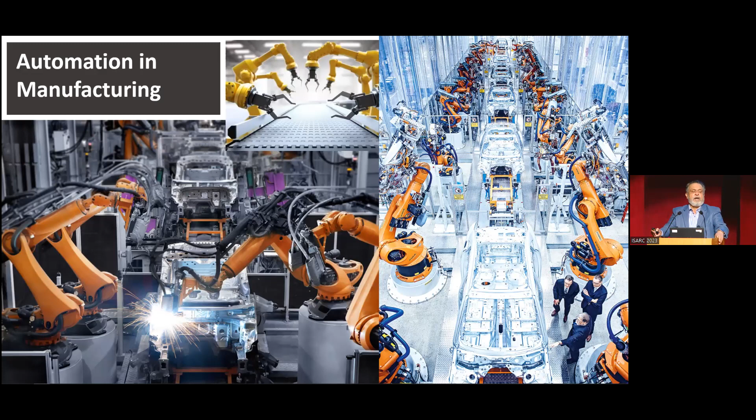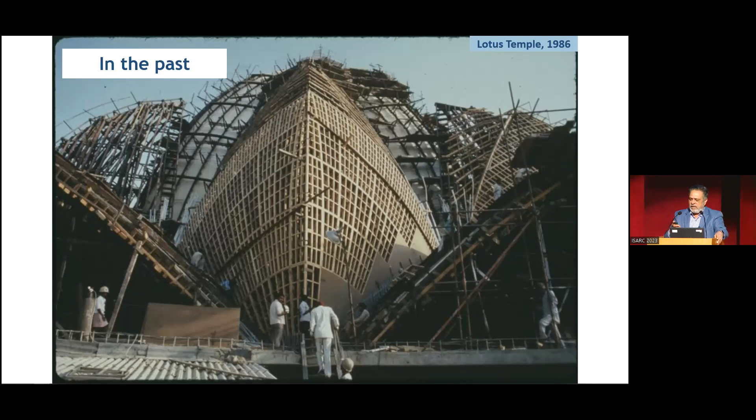Suppose you do a similar building now, maybe we'll do the whole thing with precast. The Kanteerava Stadium in Bangalore that we built is completely precast - probably you could have used precast here and it would have been much faster. This almost took 6 years, using all white cement concrete, no touching, nothing, and we were not allowed to do any welding for the reinforcement. All stainless steel reinforcement - those days, it was all something new.

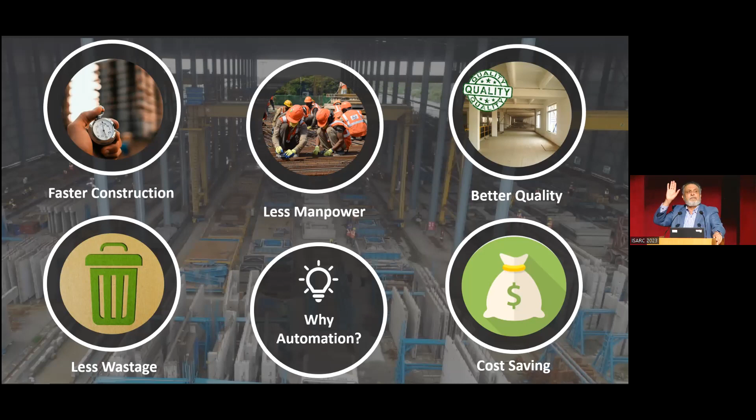Still, I'd like to say I'll show how interesting this is, because I call this the real original hardware of the world. We do buildings - this is real original hardware.

Coming to why we need construction - yesterday I was shouting at my people. I went to 3 places, including Bhubaneswar, where that building is completely steel - a hospital with 3,300 beds, all steel. But we don't have workmen. People went for Holi, then Eid, now Bakrid, and now they're going for the West Bengal election. So we have a huge problem on hand.

We are doing the central secretariat, and there also we don't have people. The government wants everything very fast - some contracts say Mr. Modi is pushing for completion in 2 years, but the technology is still outdated. We keep telling them we can't do things fast if they don't change the technology, and they're somewhat amenable to that. So manpower is not at all there - it's not that it's less, it simply isn't available.

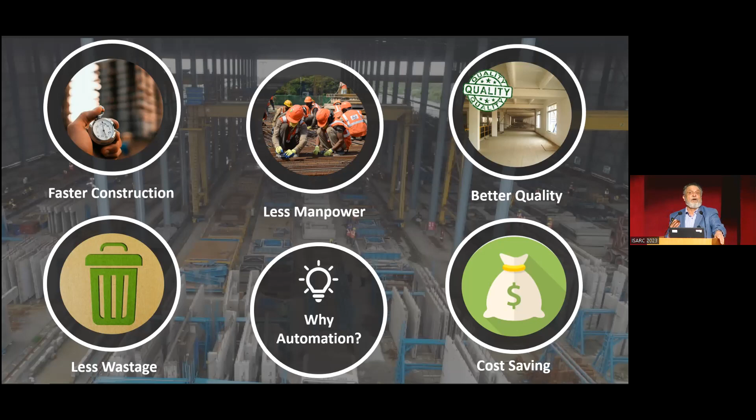On the first and second, I sent all my people to Ranchi to meet with contractors and workers. We also have all the numbers - I'll show you our digitalization efforts. All workers who come to L&T, who get trained and get a health checkup, we have their phone numbers and send them SMS. We have about 10 lakh workers, about 1 million, in our database, and we keep messaging them, but still people don't come. This is a problem we have. Wastage is also very high, and costs are very high. We don't waste 40%, but still there's a lot of wastage in the construction industry.

I will explain where we are today with respect to automation and robotics. I'll take this up in 4 phases. First is precast construction - I'll explain precast modularization, steel building modularization, 3D concrete printing. Then the latest one I feel is PPVC, prefabricated, pre-finished volumetric construction. I'm dividing this into 4 parts.

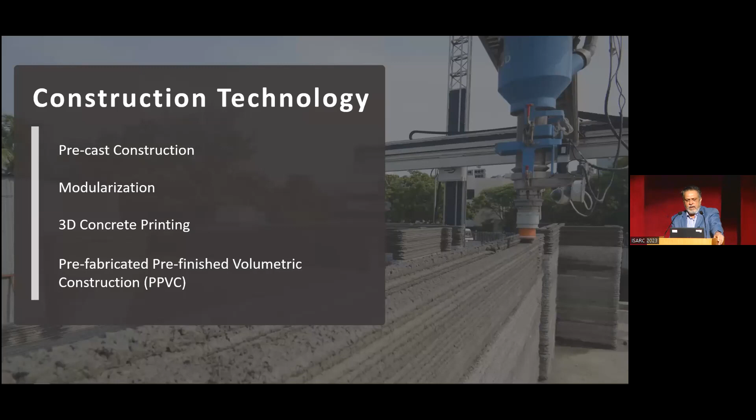In precast, the infrastructure sector has adopted it to a great extent. Whatever you see in India's metros - all the pillars and such - only the cast-in-situ parts aren't precast; the rest is. Whether in Chennai, Bombay, or Delhi, precast has been widely adopted in infrastructure, especially metros. We also adopted precast in housing, especially affordable housing. People doing elite housing want changes and we can't manage it fully with precast, so whatever mass housing we do, we try to do with precast.

We also use a lot of hollow core slabs, especially for IT parks and offices, trying to use precast to the extent possible. In precast buildings, we're also using pod parts - in Bombay, even in elite housing, the toilets are pods. The pod consists of the EWC, the bath, the fittings - everything is there. We just have to erect it.

We tried this once with concrete and then continued. I've been told that in Singapore, all toilets are made only by pods. Maybe this is something we should tell the country, because in a project of 2,500 apartments, you have 10,000 toilets. Doing 10,000 toilets - the cladding, the waterproofing, making sure it doesn't leak - is the biggest problem we actually have in housing.

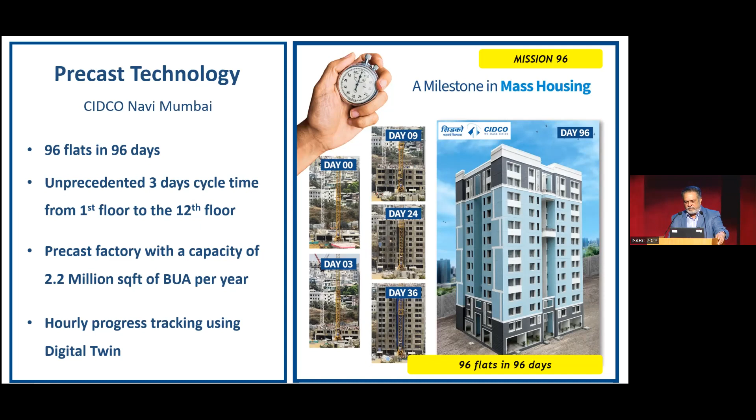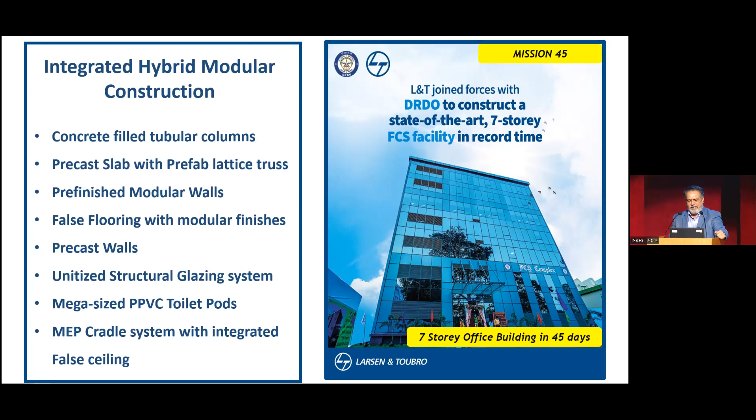We're also using robotics for block work and finishing. To be frank, we tied up with a company, invested money, and they made the robots, but we're not able to do block work beyond a certain height. So we're doing a lot of tweaking so we can do block work, plastering, and painting with various forms that we can remove and reuse. All these things we are developing, but not in a big way yet, more as an experiment.

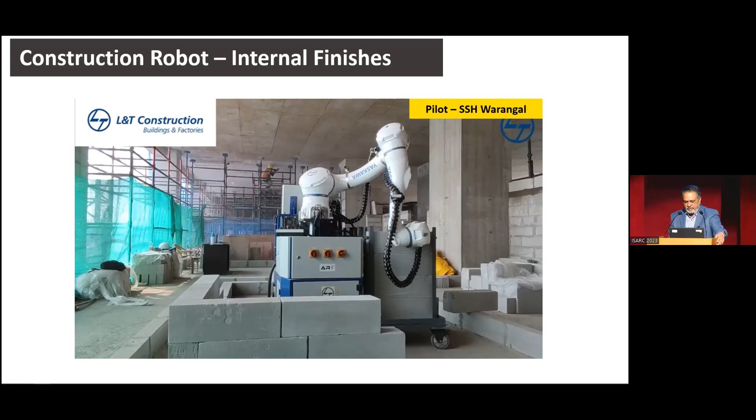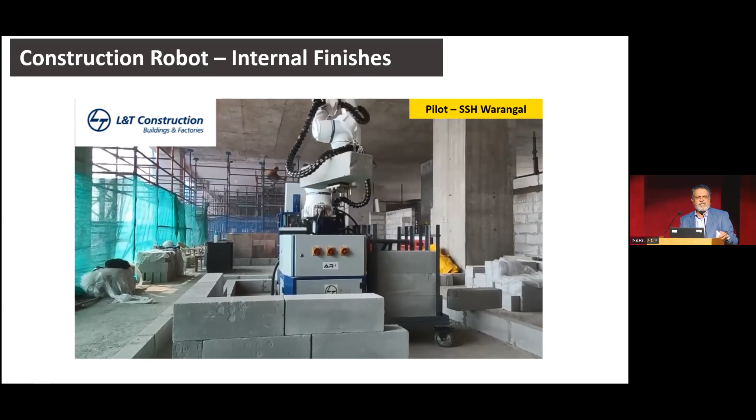But when we don't have workers, this is useful. We are doing this in Warangal, a hospital being built very fast using robotics. It is a massive machine right now, maybe it will become slimmer after some time.

This is something that's a real favorite of mine. This is a post office we did in 43 days, including the foundation. The actual 3D printing itself we can do in 7 to 8 days. This is in a place called Halasuru in Bangalore, very close to the Halasuru post office, and we did everything here with 3D printing.

We also did work in Cheyar, Tamil Nadu, where they gave us a contract to build a factory. They had many buildings, administrative, security, all ground and ground plus 1. We told them we'll do everything with 3D printing, and they agreed as long as we didn't charge extra, so we managed within that cost and did all those buildings with 3D printing.

On the right-hand side, we're doing a project for the BRO, the Border Road Organization, a museum and a place to stay, ground plus 2. This building, 36,000 square feet, ground plus 2, we are doing with 3D printing.

This is probably the largest 3D printing done, they say in the world, but definitely in India. This is the largest 3D printing we are doing now. It will be ready soon. Including design, we had to design this building, and we do the foundation. All the foundations here we did precast. Even in 3D printing, the walls are all 3D printed, but all the slabs are precast. That's how we do it.

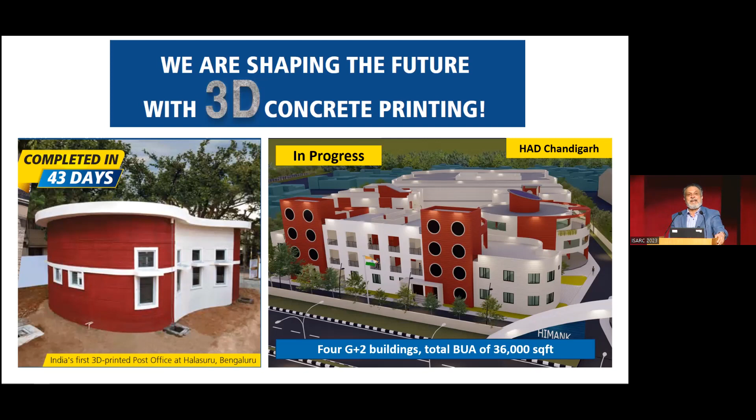I took some developers to show that this 3D printing can be used for villas. So I got a contract to do 12 villas in Bangalore by a developer called Prestige. I need to promote him because at least he's agreeing to do that. When I was doing 3D printing, I called a lot of developers, people from academics, people from IIT and all to show how it can be done. This fellow was very much impressed. I'm doing many jobs for him in Bangalore and Mumbai and all. So he said, okay, do these villas with 3D printing. We got it, did a mock-up, did the testing and all. Hopefully some of those people will be doing the first 3D printed villas in India. This is how we are doing the 3D printing.

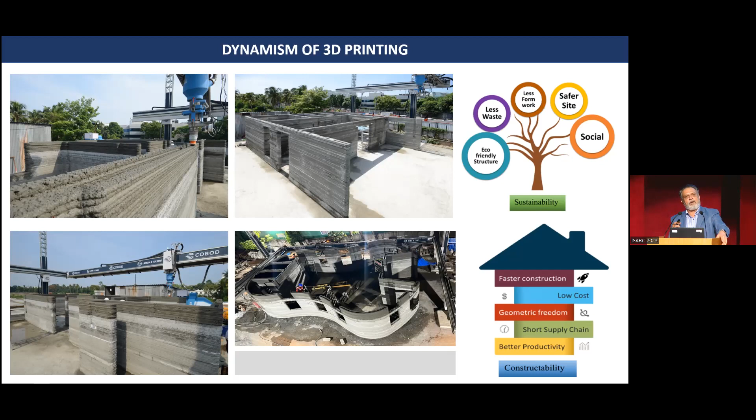Actually, our finishes are not that great compared to others, because we had been to the Bauma exhibition in Germany, and what we've seen there, the finish is much better. But what they use is usually cement and sand. We actually use cement, sand, and aggregates also. We don't use this manufacturer - we manufacture in our own batching plant. We have special plants where we manufacture the concrete. So we use the regular concrete because we're proud that we're using the regular concrete.

This is PPVC - prefabricated, pre-finished volumetric construction. There are many hotels in Singapore and all which use PPVC. We are talking to IIT Madras to do their hostel block with PPVC. I'm sure it can be done, but it will take a lot of time to construct this in a workshop. We'll do it in a very controlled atmosphere in a workshop, and everything will just be lifted into place. I think that's what SNS said - I'll do it in 64 days. So probably if my boss says that, then we'll do it at the fastest speed.

The next one is ModPro, where we are doing buildings with steel, around 350 to 400 square meters - primary health centers, clinics and all can be done with this. We can also do single floor low cost housing with ModPro. So these are some of the technologies that we are doing in construction.

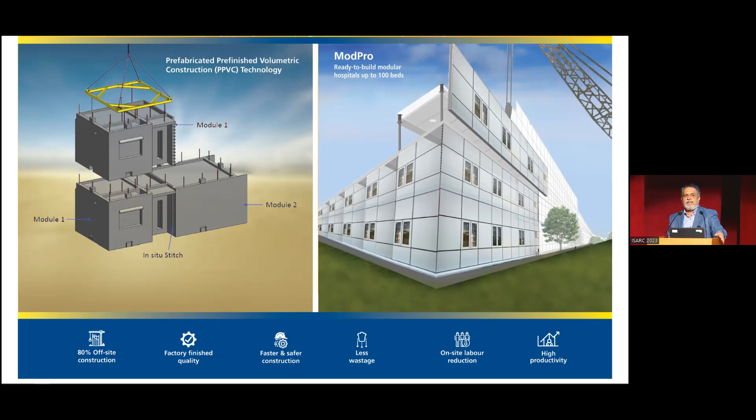In construction itself it is less used, but in other construction related activities like drone survey, I think we are quite big and doing very well. We also have LTI Mindtree, who is also doing drone survey. We use it for data collection, site planning and design, topography, and progress monitoring. I think this is some of the projects where we are using this technology.

We use it in the Mauritius Light Rail transit systems, our mega irrigation project, and in the high-speed rail also - there we fly drones every day evening to see the progress. We did the Statue of Unity, 182 meters on the Narmada River, where it's completely infested with crocodiles. We did the whole survey with drone and were able to take all the contours.

We did a big project for water supply in Madhya Pradesh, going through forests and all, which was an EPC job for us. We completely did a LIDAR survey through helicopters, and based on that found the best route. So we saved some money since it was an EPC bid for us. If I took the route through the jungle, which is much easier and faster, I was able to do it because of the drone survey. I think this is where India is doing very well in terms of drone survey and monitoring physical progress. I think we are doing quite well here.

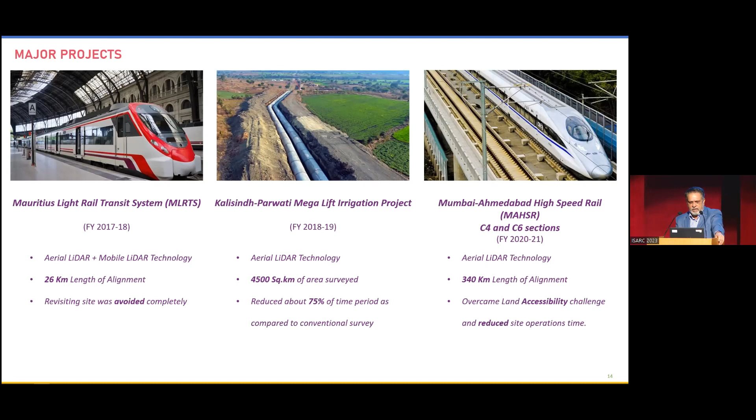Next comes Internet of Things. Here also I think we are doing pretty well, because many people from the US come here and say that what you're doing in IoT is much better. I'll just tell you.

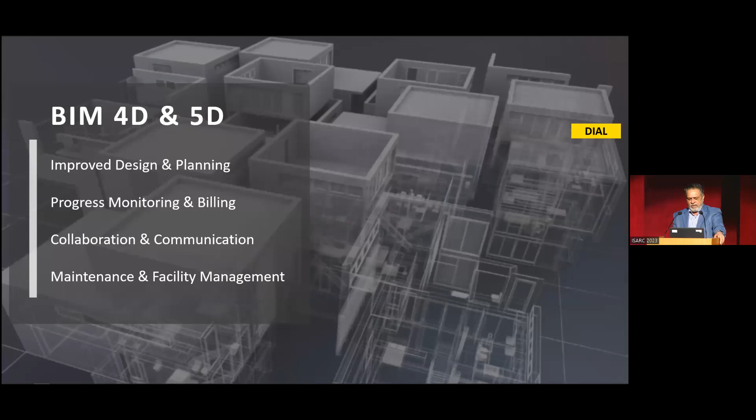All our tower cranes and everything are completely digitally controlled. Every day you can come to our exhibition center and see how many cranes are working across our projects, how many times each is rotating, and what weight it is lifting. All our batching plants are connected through IoT. Sitting in Chennai, we know how many batching plants are working at each site, how many are idle, and what stock is available there.

I think all these things are known to us. We are also able to put RFIDs and see where things are. Even in precast elements we put RFIDs, so when we do the erection, we know that this precast is erected. So we are quite big in this.

So now L&T Infotech and Mindtree, LTI Mindtree it is called now, they do this thing.

This is BIM, and 4D and 5D. L&T started the first BIM in the Delhi International Airport in 2008-9 when we began. The whole design was done through BIM. From that day, all our design-build jobs use BIM, and today we are using BIM in IIT Roorkee.

What we have done is that the whole billing is also in BIM. We discussed with the CPWD guys and told them we need to do something different in this project. They agreed, so everything in the project progress is seen through BIM. All our projects go through BIM.

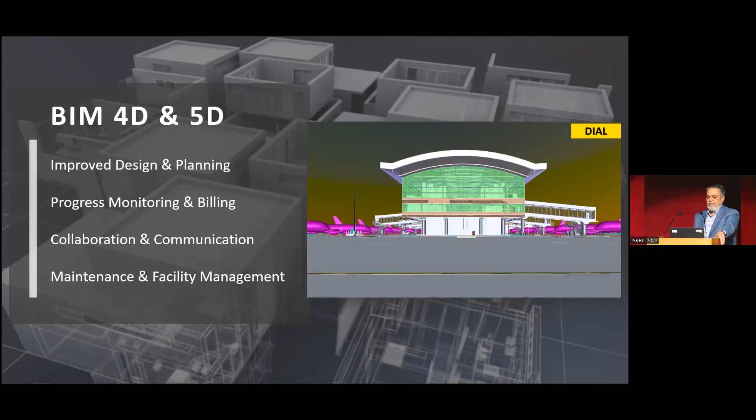We actually have safety schools, one here in Chennai, in Kanchipuram, and one in Baroda. It is an experiential center where you can go and see what happens when you fall, how you fall, everything is learned there. We also have VR there, with all our programs in various languages of India. So before we take workmen to our sites, we send them through this so they know what it's like. You can actually feel, suppose you fall, you can almost imagine that you're falling. We are trying to make sure that most of the workmen are safe.

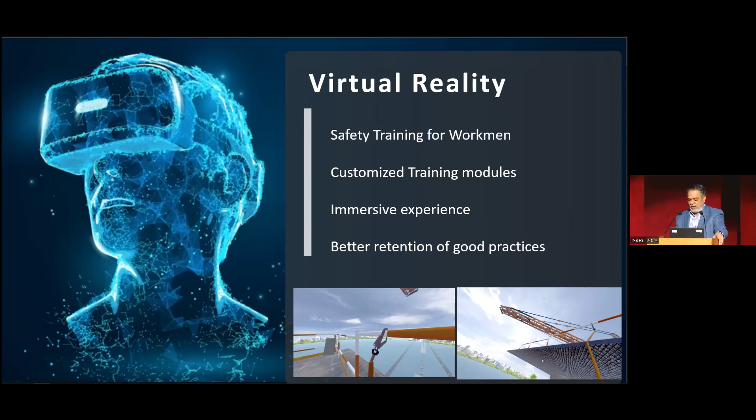We are also able to do predictive analysis with safety. We can say which job sites are prone to what, like things falling from height, or electrical circuit problems. There's also excavation work, during which we do risk profiling of similar jobs, like the professor was saying, we already do that. So we do risk profiling for each job and say, in this job we need to focus on this. This way the project director and project leaders know what needs to be done. I think we are already doing this.

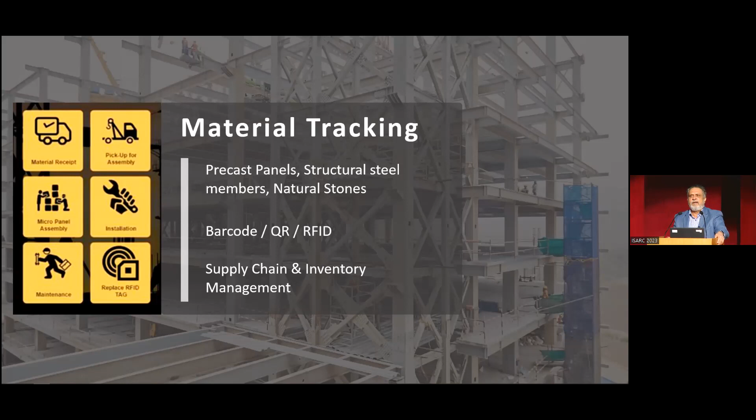Next is material tracking. As I mentioned, for precast panels, structural steel members, all these things we're able to track using barcodes. For the Statue of Unity, we got the bronze panels from China, and we had RFIDs on all of them, so we were able to assemble things and update it through BIM.

The next one is an app called Visa, for the workmen. Here we have a database of all the workmen, and when we onboard them we capture their attendance, when they come, when they go, the periods when people work and don't. We also do health checkups - somebody is good, somebody is bad. This fellow can work at height, because not everybody can work at height. At ground level people can work, but when it goes to height, it's not possible. So that is something we do.

I think AI is learning, and similarly all of us are also learning. This is what I think will be the future one day.

Drone erection is also happening today in many far off places. If you see the transmission towers where people cannot go, it's all being done through drone erection. It's happening even in India, and we have done it, along with many other companies. Probably you have to do it in a project where we just send materials to robotics, and then make sure all erection is done through the drones. Very little physical interference - I think this is what we are thinking, because we simply don't have people.

As Professor Benny rightly said, this is the most hazardous industry. Nobody wants to come here because, even though we are the most populated country in the world at more than 1.4 billion, we are not getting people. And the productivity is so bad.

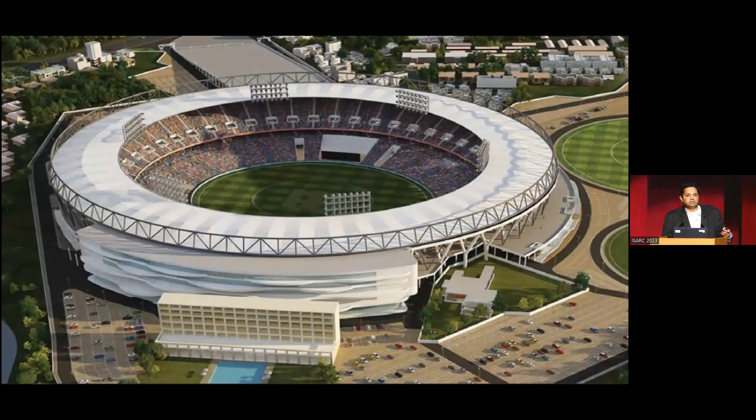So I come from the B&F vertical. You will see the presentation is fairly influenced with mostly buildings and factories. I am going to go into a little more detail, though it will still be rushed. We won't go into very great detail, but you'll at least get the flavor of the things we're doing in recent times in terms of technology and the digital space.

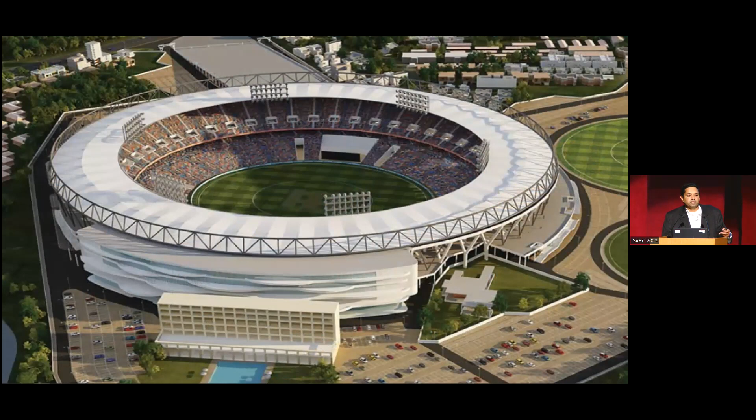And if I have to list out some of the largest and tallest, L&T, we keep telling largest and tallest. This probably comes first, the Shri Narendra Modi Motera Stadium. We are doing the high-speed rail. This is not part of our vertical, but again mega - this girder you see is about 40 meters long and weighs 1,000 tons.

The fun part is the team is not excited about the girder, but excited about the straddle carrier they built in-house to carry those girders. The automation, the precasting is a norm, but the automation or mechanization we are pushing through is evident everywhere. Pick up any project, especially in recent times, and you'll see we're trying to do things very differently.

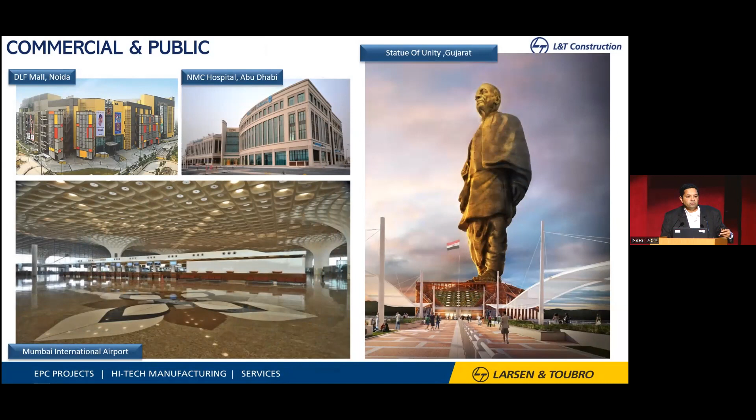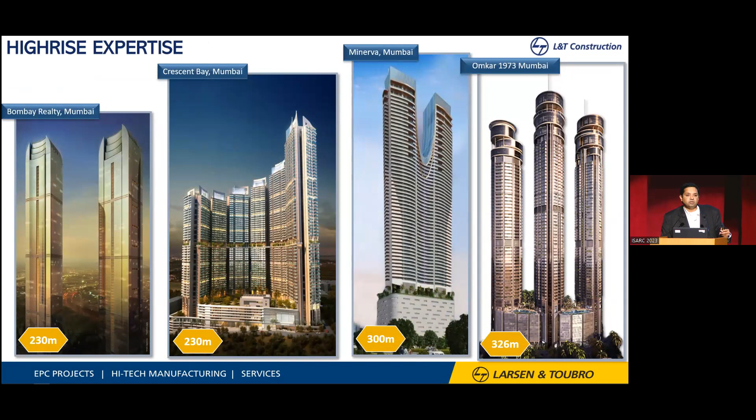When I go into the details now, I'm going to rush through the project-specific details, but there are 3 or 4 slides we'd like to build on in line with this conference theme today, and where we feel the last 15 to 20 years, and where the company is moving. If anyone asks me what is the construction mantra, the answer from everybody in the team would be: one is mechanization or automation or bringing in technology, and then again, the last 5-6 years, the other side has been digitalization. These two things are encoded in our DNA.

In every project, you will keep seeing that. And what closes the loop is the innovation and efficiency behind it. So it keeps going in that circle - your mechanization brings efficiency, that efficiency is tapped by digitalization efforts. We collect the data, we analyze the data, then feed into saying what we need to innovate further, and that goes into newer technology, and the circle keeps going.

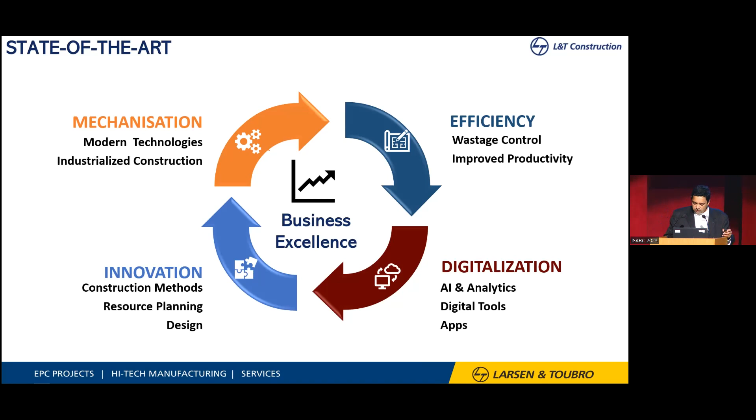So you take a G+4 low-rise building, not great change - we are doing it well, maybe we have to push it a little further. If you go into 10 to 30, 35 stories, a lot of changes are coming in the way we are building these buildings. Again, if you go to the high-rise system, maybe 50 stories tall, whatever we are doing is probably fine, we're already doing that. We'll start seeing some changes in modular systems, but the crux will always be some sort of hybrid system - not one technology will rule the construction space.

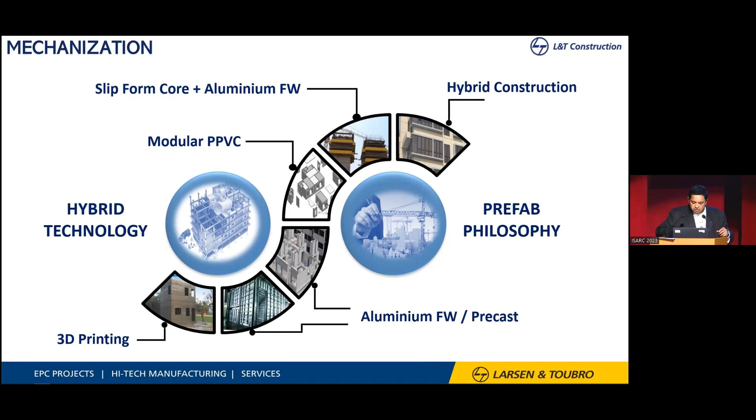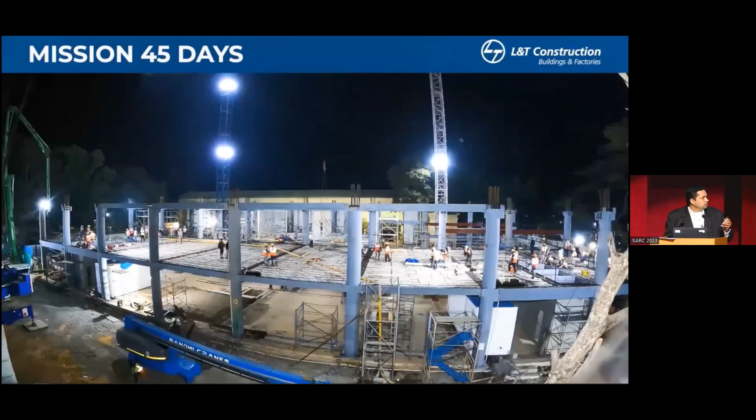And the undeniable thing would be prefab or off-site manufacturing. Whatever challenges we discuss now, not having the workmen and all, we will have to take that construction off-site and build at that efficiency. This is actually one of the finest examples of that off-site construction - Mission 45 for DRDO, whatever building you're seeing was built in 45 days. This is a kind of imagination or time-lapse video of how that building was done.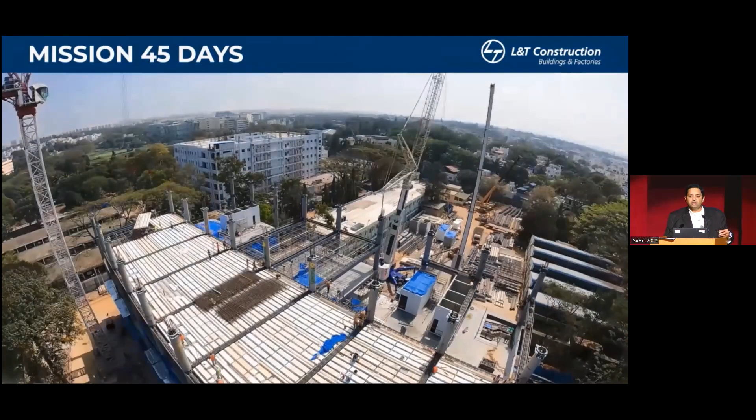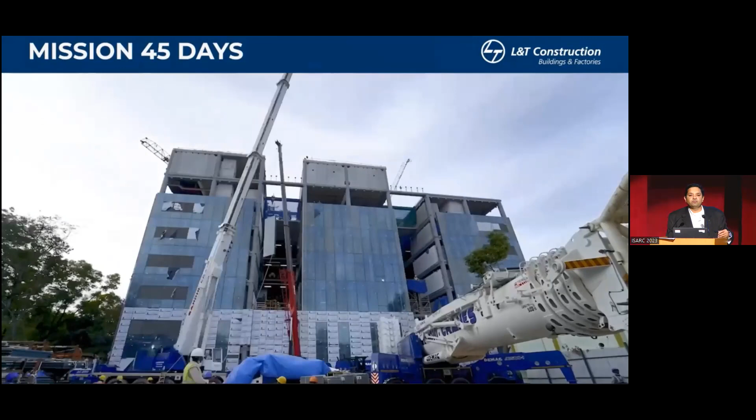But exactly as planned, right? That's where that assured delivery, what we follow now - that we will tell you something, we will try to deliver the same thing in what's promised.

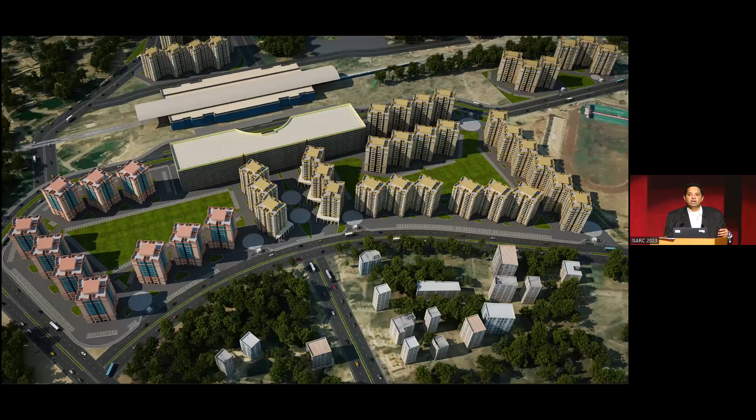If I get into the residential side, now we mentioned about that Mission 96, but the whole precast was feasible there because of that large volume, right? The entire tender was about 45 lakh square foot of built up area. And that's not the fun part - the key thing was, it was to be delivered in 42 months. That's the kind of projects we are looking forward to in that space where precast was taken up.

And if you look at the math again, it's about 8 flats per day - that's how the delivery schedule is. This is where we took that call that conventional systems cannot be used to build this project. The entire tender was at that time taken using precast construction.

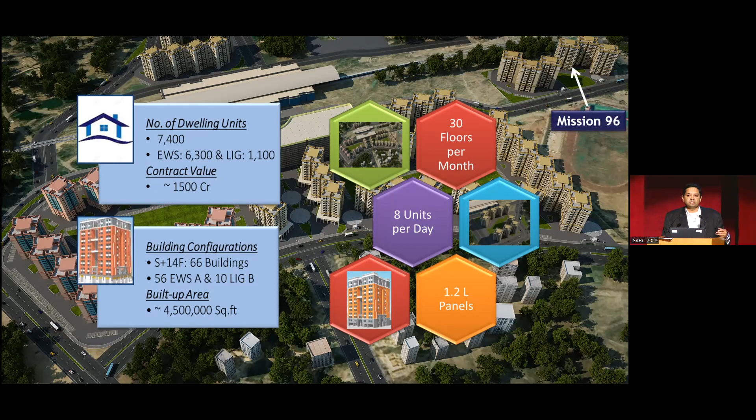And if you see that one corner tower, then later we say what the technology can do best, what we can showcase with the technology - not per your plan, but the best of the best. That Mission 96 was taken, where we built one tower, 12-story tall, in just 36 days. That's where the technology, the mechanization is standing, right?

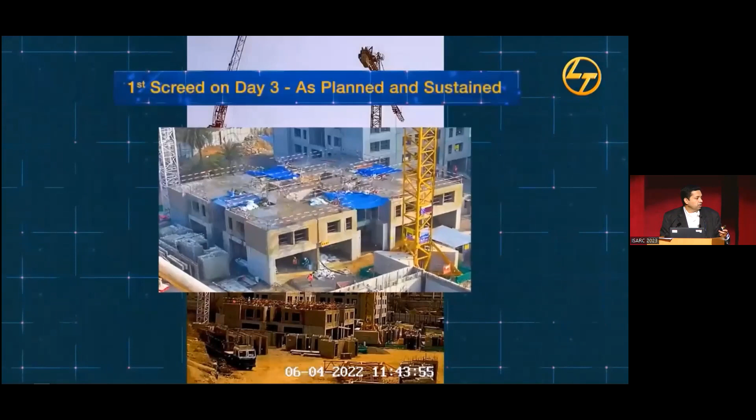3-day slab cycle, which is what we have been pushing for the last 5-6 years in that space, and that was achieved quickly. Again, this is a real-time time-lapse video, right? It was slab itself in 3 days. Like usually we do 6 days, 7 days, then pick up and go with that thing.

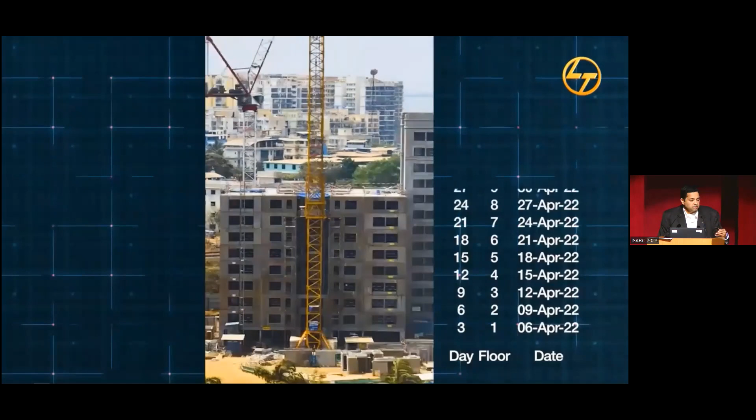But exactly as planned, hour by hour planning, and delivered in 10 days. The water tanks also were delivered in 7 days - total precast system. We had water in those tanks in 7 days. Finished as planned.

Then we come to this 3D space, right? Why we are doing 3D - a lot of times the question will come, okay, why 3D? Yes, it is a speed game, but more than speed, it's a productivity game, right? If I say a job where I need 100 people in conventional construction, I go to precast, I'll need 30 people. I go to 3D and probably we can handle that in 5 or 6 or 10 people and get the job done.

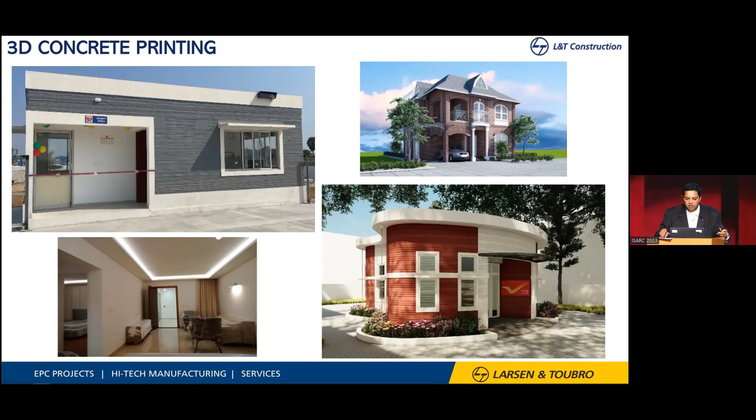And this is again one more time-lapse video for that post office building, right? This was one of the first jobs, but like I said, 43 days, and the actual printing was done in about 12 to 15 days itself, exactly as planned.

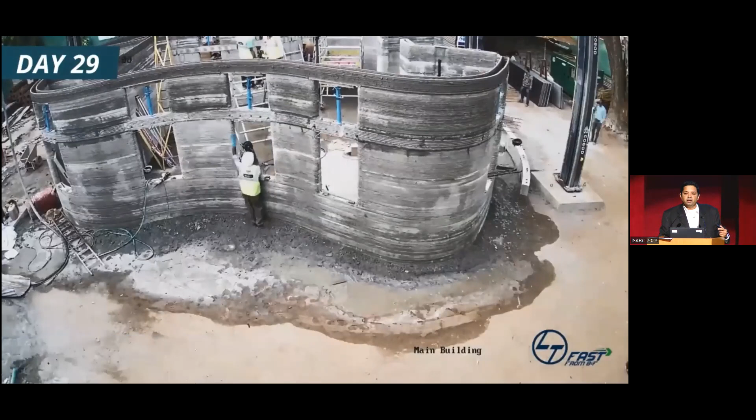Again and again, everywhere you will see that timely delivery is what the motto is, what the focus is. We will promise you something and we will deliver in that time.

This was one of the unique jobs where we decided to keep the exterior with that 3D technology and not finish it or plaster it. Because plastering it - okay, we are used to seeing that - but then that kind of takes away the advantage of what you're building in terms of speed using 3D. So you kind of have to learn to live with the technology and not try to force whatever you've seen for the past 30 years into the technology and then take the efficiency out of it.

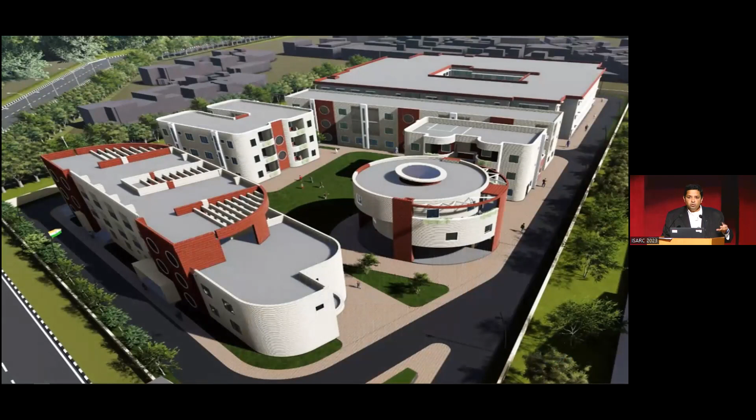So with that experience, now we took the next step where we have our SLN here who has been driving the 3D, and we took this job, almost 36,000 square foot of built up area. And you will see peculiarly in that job, again, we are trying to take the advantage of the technology - you will see the buildings have curves.

You see the middle one - I think Rajkumar Murli is here, you can interact with him - but he sliced the building, and the way it is designed now with the shifts and all, it's a nightmare to do that in conventional formwork, right? We had some areas where we said we will do beams and all, but the site team is coming back and saying that I don't want to do conventional, I don't want to go ahead with that system itself.

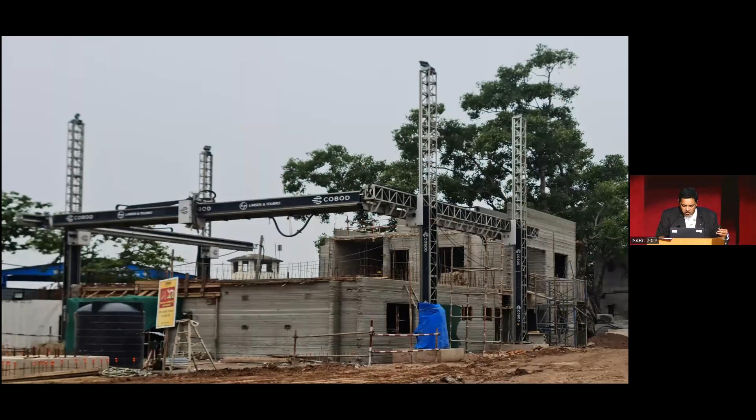And this is actually the real life picture - this was taken 10 days ago, but between those 10 days now, we probably built another floor. We are hitting that 6 or 7 day cycle and continuing, right? Then next we discuss about the PPVC.

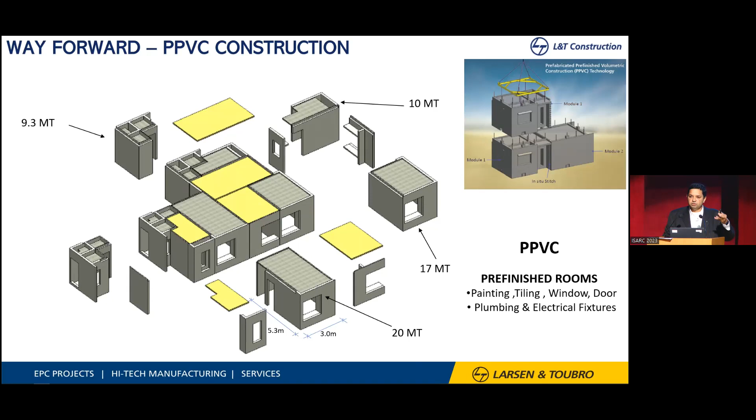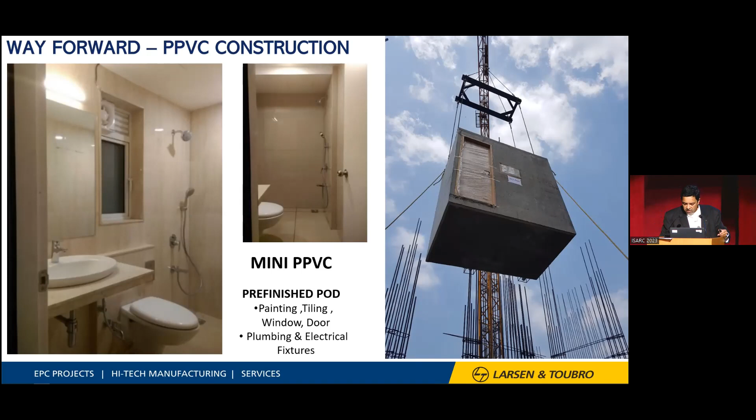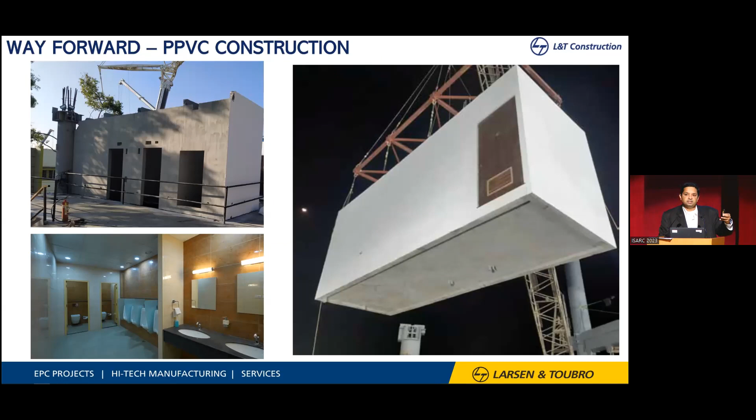The same approach was extended in this DRDO building for the larger commercial ones. These are again 30 ton pods, but here the finishing is done at the site level - pods are brought from the factory and then installed.

So with that, we quickly come to the second part - the digitalization, mechanization. Yes, we have been doing that, and of course we've been doing mechanization for a much longer time. Digitalization is new, maybe recent - the last 6-7 years we've been trying. But why do we need digitalization in construction?

Most times the answer is BIM drawing, but what we have done is probably taken 6-7 steps beyond that. We are not using it just for BIM. The BIM of course becomes the central model around it, but what we're looking at is the interaction of various agencies in that construction project - not even just internal, lot of times external agencies, even the client, can look at it. Clients are reviewing the BIM models, approving the finishes.

For that Sidco building, which came right in the middle of COVID, our architectural finishes were first approved on a BIM model and a VR set at that time because they couldn't visit the site. So we visited their offices and showed that, and it was approved in that way.

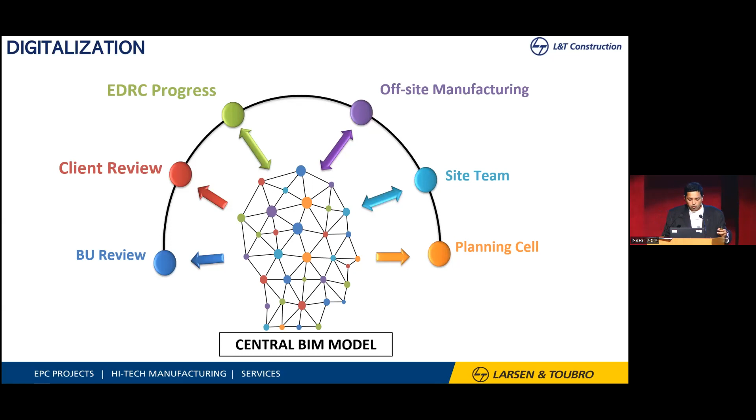In that line, we have been pushing this digitalization, and you will see several activities across L&T. That true big data sense we will get when we start looking at all our equipment, all our connectivity, a lot of numbers. But what it actually translates into is we're trying to push it across the entire construction ecosystem, not just one area like drawings or P&M. These various aspects are becoming a way of life, and that's where we call it the digital ways in L&T.

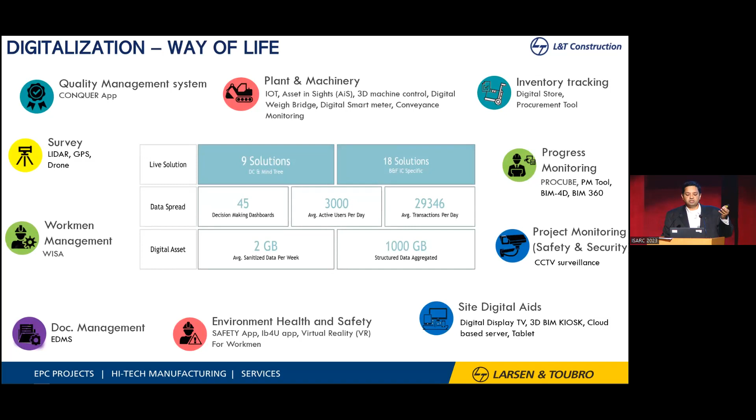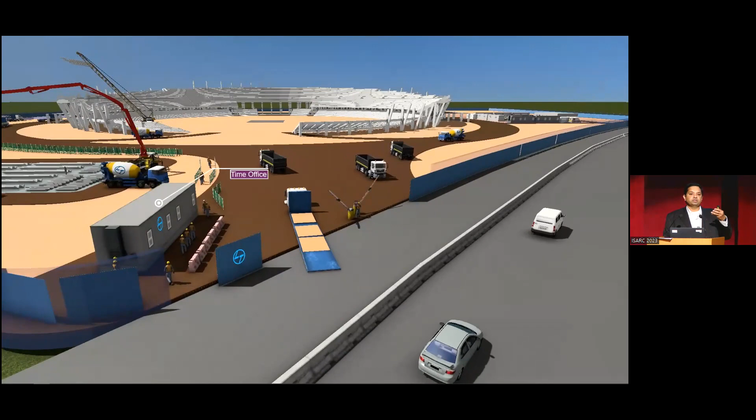So this is a simulation done pre-tender, for a stadium - not only for the client but even for our team, to see in real life how we will set up the project. The project director gets that whole view, and his experience lets him quickly say this doesn't work, this works. Instead of a 2D drawing, we're walking through each step, each activity, including people walking, the walkways, how they get in and out of the site.

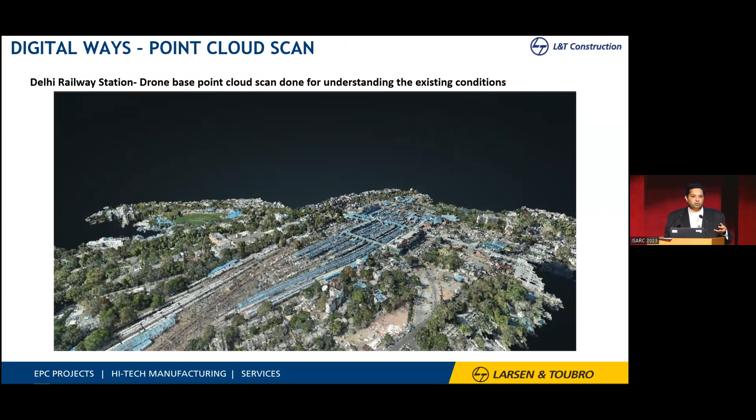This is another example, for the point cloud - day before yesterday there were a lot of debates on that. But for this Delhi Railway Station, we have used it and it works beautifully. Instead of just looking at a 2D picture, you now get a 3D real life model directly scanned from that drone. BIM - we've been using it since 2008, but we have probably now taken it to the highest level.

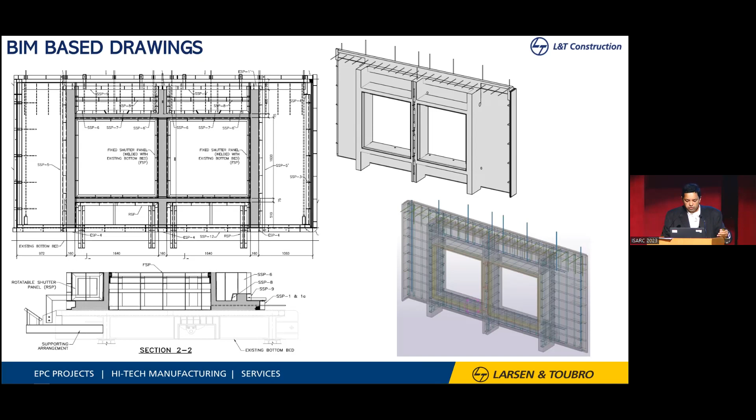But that's not the end, right? Even the molds, our CMPC teams, they define the molds, design the molds using that same BIM model. So I don't have to worry about repeated information and the issues that come because of lack of information. Then what's next on that BIM model is we built our own app to track it.

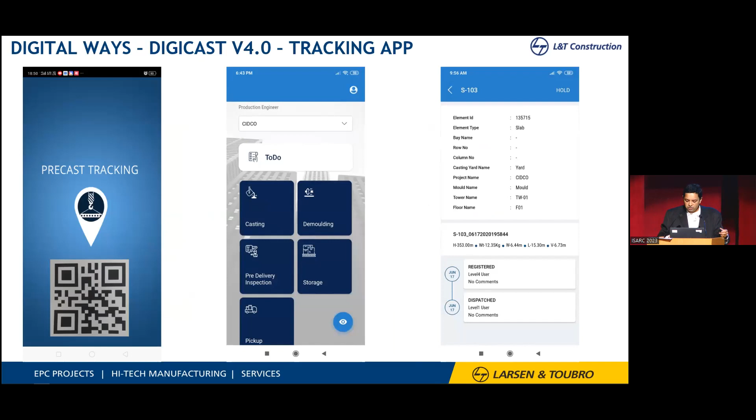I think what now has become a material tracking app for our entire B&F, but it started for the precast, where the idea was you have each element, you track it through the entire life cycle. When that element was cast, with what grade concrete, who checked it, who signed the checklist, how long it was stored in the yard, when it was shipped to the site - the entire life history is being tracked.

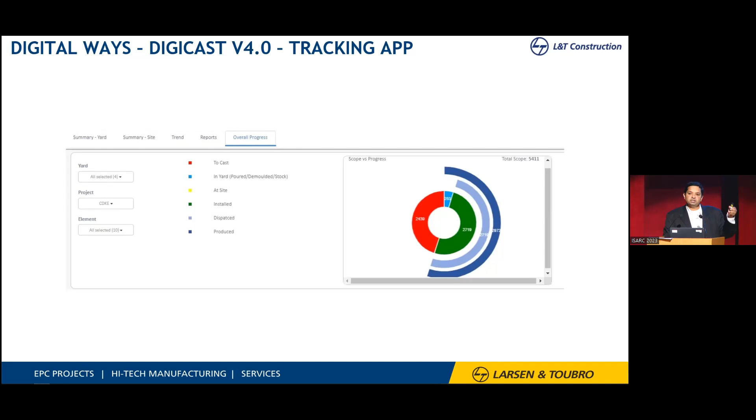And that's record keeping, but it's all real time. Usually we've been doing that in an Excel spreadsheet, but here we are looking at the moment the scan is done, at 8 o'clock in the night it shows on the portal and adds, okay, saying these many elements are there, these many are on the truck, these many are site stored. It gives me a real time picture of actually how many elements or how many towers are also being built.

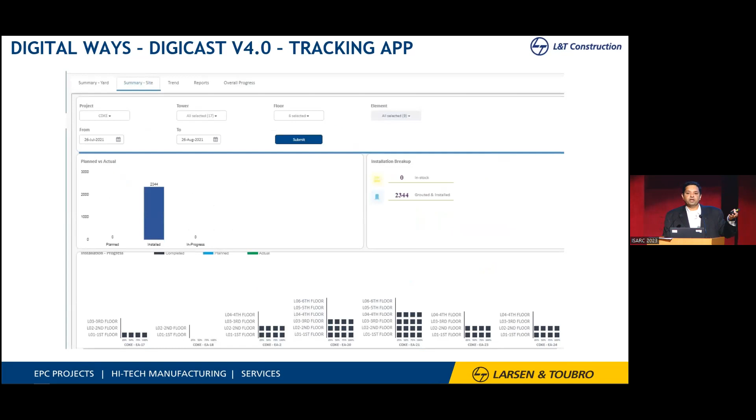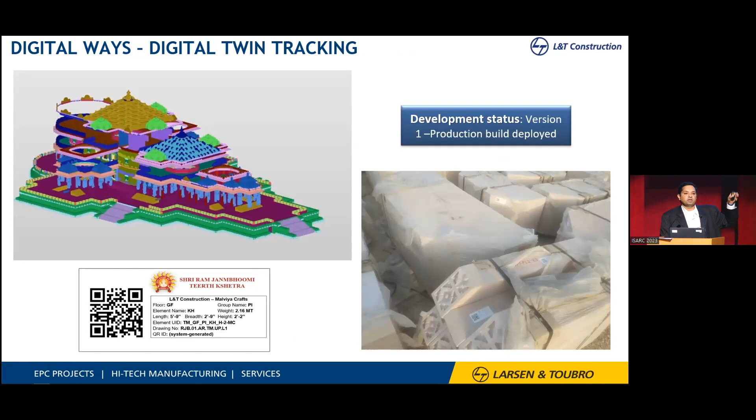Then we took that next step to move it to the digital twin. So the same model was taken to the Ram Janmbhoomi temple, where we are now actually showing that status on the model. So the client gets to see the stone of column F2, each has 7 or 8 elements, whether they're in quarry, whether they're in storage, and whether they have actually been installed.

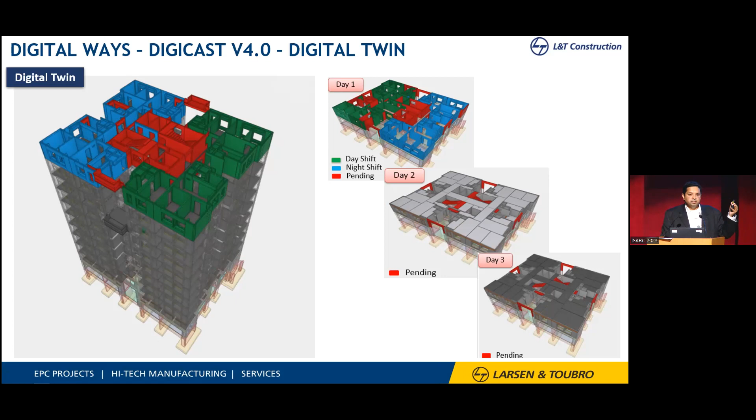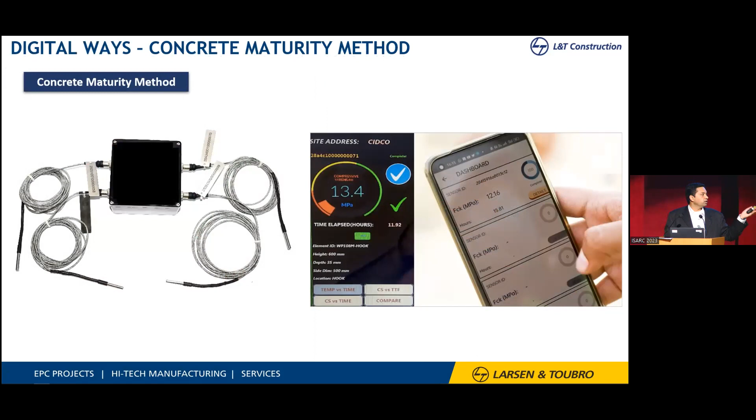Another thing, again for efficiency, we are tracking the concrete strength development in real time. So there are actually meters put in there, and that gives me the actual strength so that I can plan the next activity immediately. Usually we used to estimate, we will wait 4 or 5 hours. Here now that strength is being told to us real time so that I can save those 3 or 4 hours and then take it further.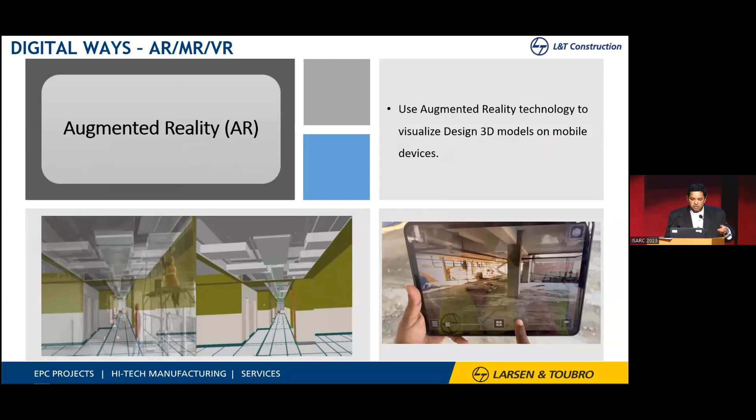And then I'm just at the fag end - how we are doing the actual monitoring and review part of it using AR, VR, whatever we have been seeing on YouTube now. We've actually, over the last 2-3 years - Kishore from our digital team is here, you can interact with him - we have started using that. What used to be a fascinating movie scene, we are looking at it, using our tablets and seeing whether whatever has to be done or not.

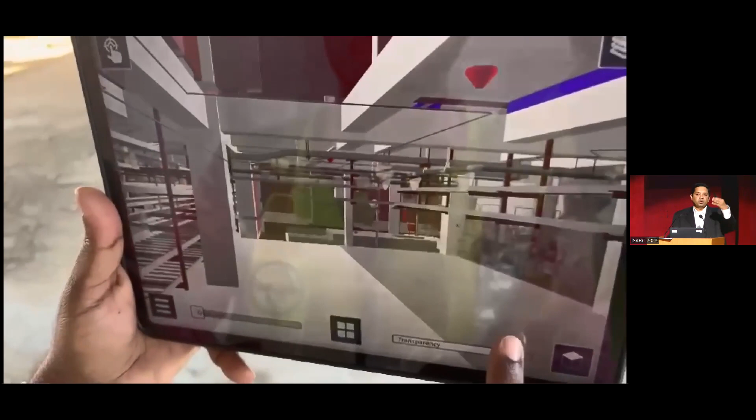Right now it is probably being used for monitoring, for status review, but quickly this is going to be a good part of our day-to-day construction activity.

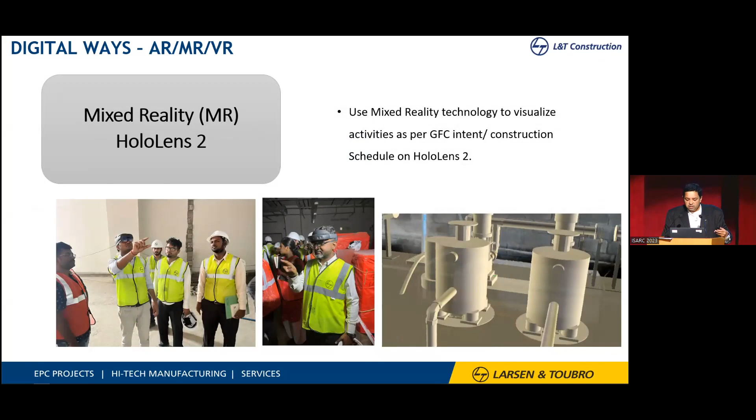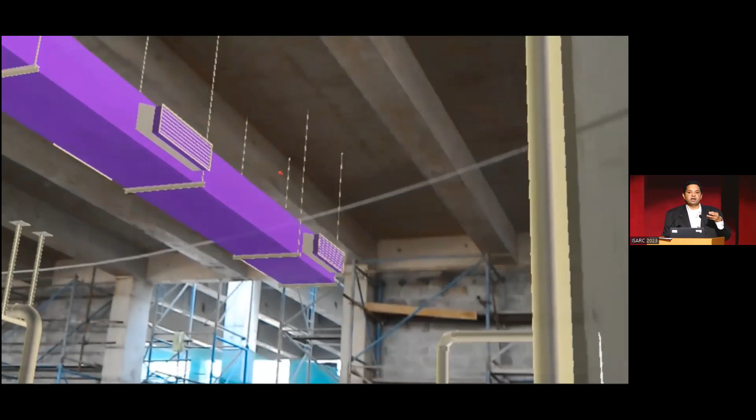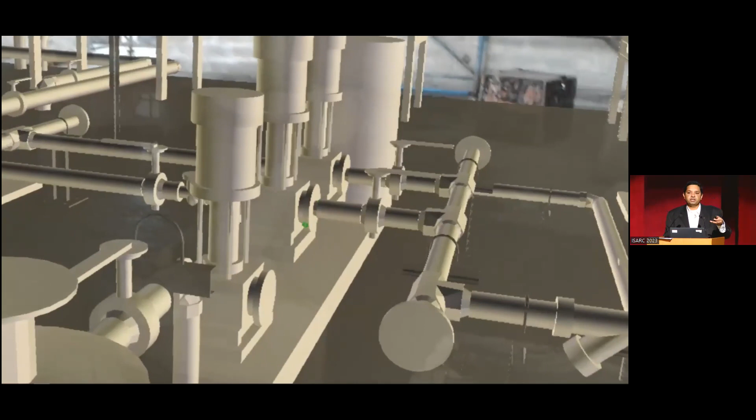So walking with the tablet is a challenge, so we said we will use the HoloLens and you can just roam around. You get used to that - it takes some good bit of getting used to it, but this kind of tools, this kind of efficiencies is going to help us build faster, build accurately. I think Professor Kamakutti was also saying that - speed and accuracy. So this is where we do the first thing right and don't keep repeating items.

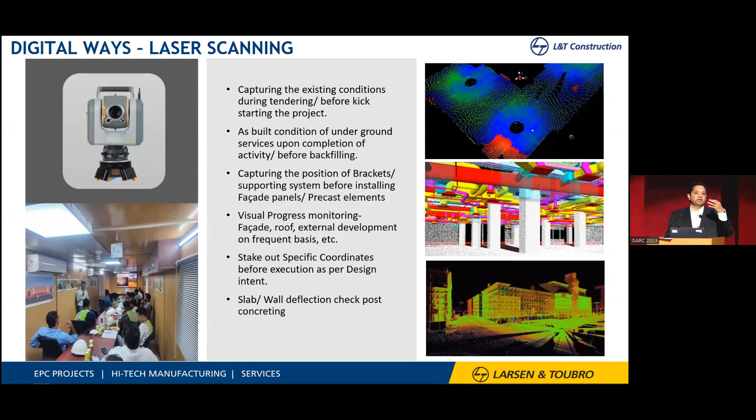The laser scanner follows with that HoloLens combination. So whatever the as-built survey, which usually takes 4 or 5 days, by the time it's flagged, it's too late. This is now becoming instant, where I quickly do the scan, I check the levels. In precast now, next week we are doing a demo where even the number 12 or number 16 dowels will be scanned to check if they are at the correct location or not, which usually takes a long time to survey each dowel to make sure those are right or not.

So in each facet, we have been doing that. You come to P&M, I think we have our Ravindran and Vishal Verma here who heads the P&M. But see the beauty of it, how in every facet we are trying to adopt it, right?

Take our DG sets. Now these are usually sized based on our experience. There is a factor, so they are usually oversized. But what we are doing now, each DG has its own smart meter looking at how much is the real consumption. So for the first 20-25 days, they monitor and then quickly change if required.

Same thing for our fuel, right? We talked about wastages. Fuel becomes one of the biggest areas of interest where you can save. And all our fuel dispensing systems now, the new ones in pilot mode, they have RFIDs. So they link with the actual equipment. So even if I have a third-party vendor, unless our site puts in the system that the RFID matches, that system will not dispense fuel to that guy. It has to be in the record.

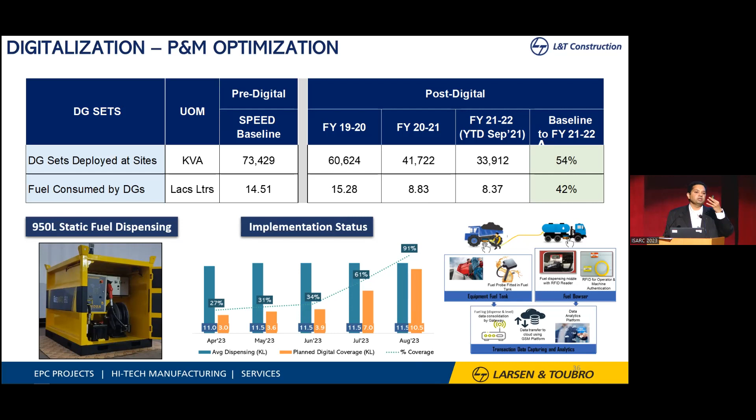If you feel that he has done his work and billing is done remotely, they can switch it off. So if he comes the next day trying to get the fuel, he may not be able to get it, and that's how we will be saving on the fuel.

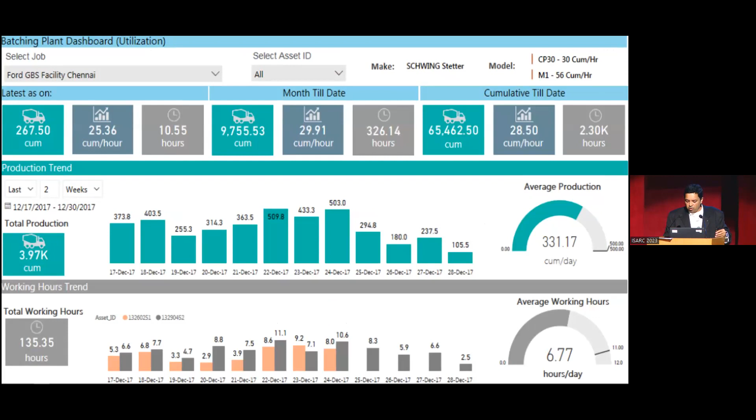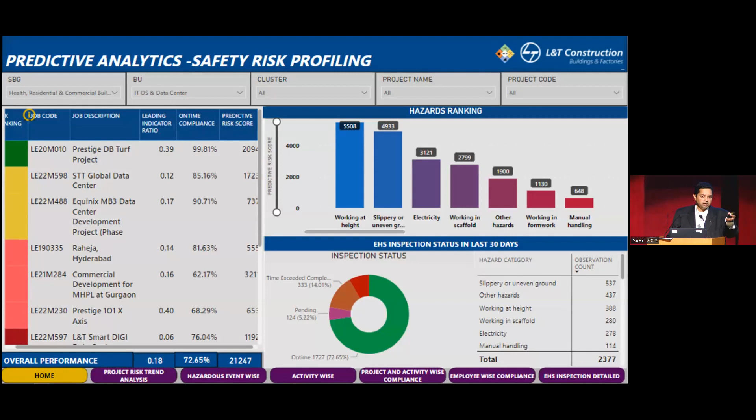Same thing we have extended to safety, the safety risk metrics, right? Each data point is there. Our own data that we are trying to not only collect now, but analyze and predict, saying similar patterns are there. So those are highlighted in the review meetings. The CPMs or the project directors can quickly take action saying, I see something is wrong. Maybe better resources are needed, a better team is needed, or somebody has to visit, monitor and check it, right?

All of your workman trainings also, these guys like it, right? They get to see so many things.

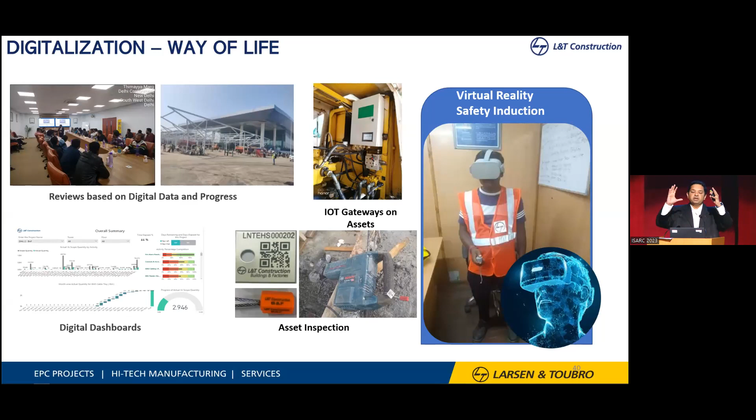Now, and this is the last slide, how this will all tie in, right? We are all talking about sustainability. Yesterday also was the first session on sustainability. And of course, L&T has been doing our part. We have our water neutrality goal. We have our carbon neutrality goal. But in terms of today's theme, automation and digital, I think one of the biggest contributors, what Professor Benny said, is wastage. And all these tools probably help the greatest to reduce that wastage and then play our part in terms of sustainability or bringing sustainable construction.

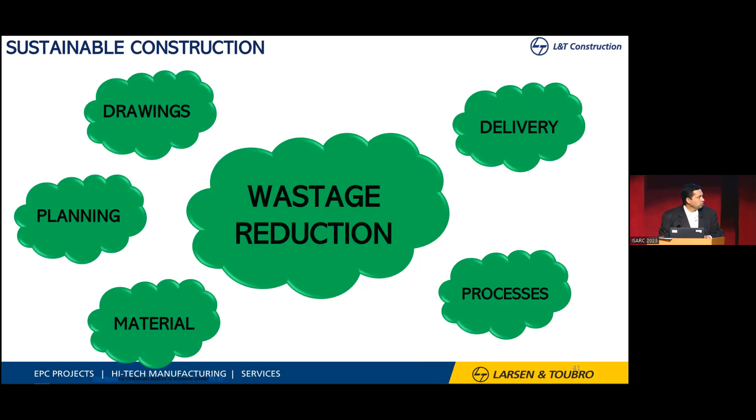And how its various facets again, like in terms of your drawings, your delivery, time is saved. In terms of your planning, you're doing accurate planning. In terms of your actual material wastage and all, what we are tracking in terms of fuel, in terms of power, overall delivery rates, overall processes. And that's how we will probably contribute towards that sustainability.

And with that, I think I would probably like to conclude. Yesterday, we discussed about Iron Man. And this is a 2008 movie, I think Eagle Eye. I don't know if most people would have seen it, but if not, I think it was pretty ahead of its time. But that AI is what we are looking at, right?

That movie had this ARIA, right? That is Autonomous Reconnaissance, Intelligence, Integration Analyst. And if you look at it, all these terms, this is exactly what a project site now is looking at - something autonomous, something that is actually looking at it and reconciling data. It's not just data collection. You have to actually intelligently apply that data and then integrate it.

So do we really need that ARIA? I think yes, that's the imagination you talked about, that it will take us everywhere. So that burden is probably on this academic community now, whether we can get that ARIA into construction and automate everything so that we can build efficiently. Thank you very much, appreciate it.